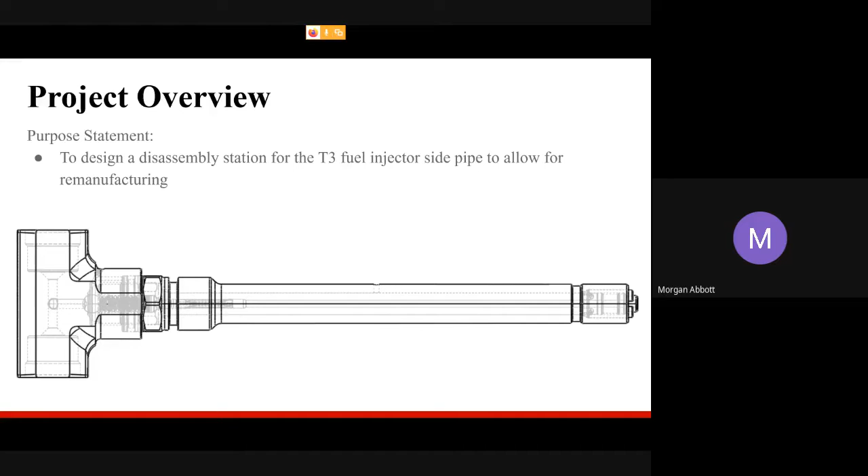Okay. The purpose statement was to design a disassembly station for the Tier 3 fuel injector side pipe to allow for remanufacturing of the assembly. Pictured is a full assembly of what we were challenged to disassemble.

The scoping statement objective was to design a disassembly station for the General Electric Tier 3 side pipes while maintaining Bosch safety standards. They gave us a budget of $20,000, and from the side pipe assembly, we had to recover the outer sleeve, the high pressure shaft, the T-piece, and the left-hand nut.

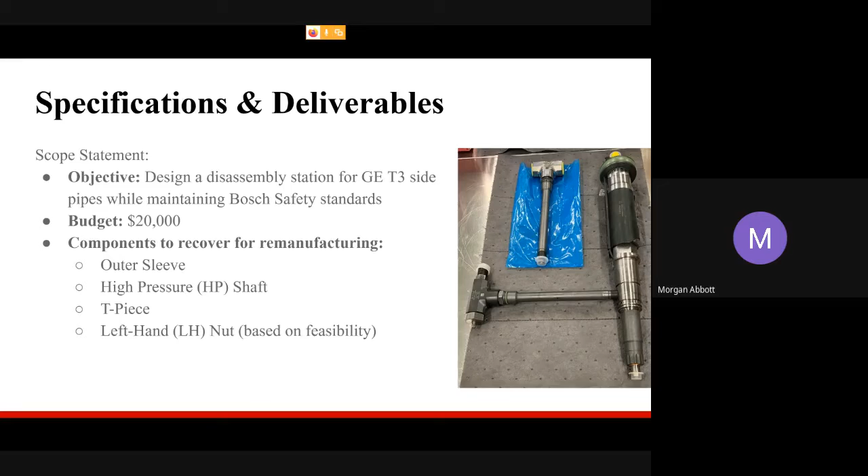The design must be capable of removing the left-hand nut, assist in the O-ring removal, pull apart the outer sleeve from the T-piece, unthread the T-piece and high pressure shaft from one another, and be able to disassemble the side pipe at any state of partial disassembly and continue in the process.

Below is a disassembled picture of the side pipe assembly, along with the parts that we needed to keep. Also shown are scrap pieces, which include the ball and spring and O-rings.

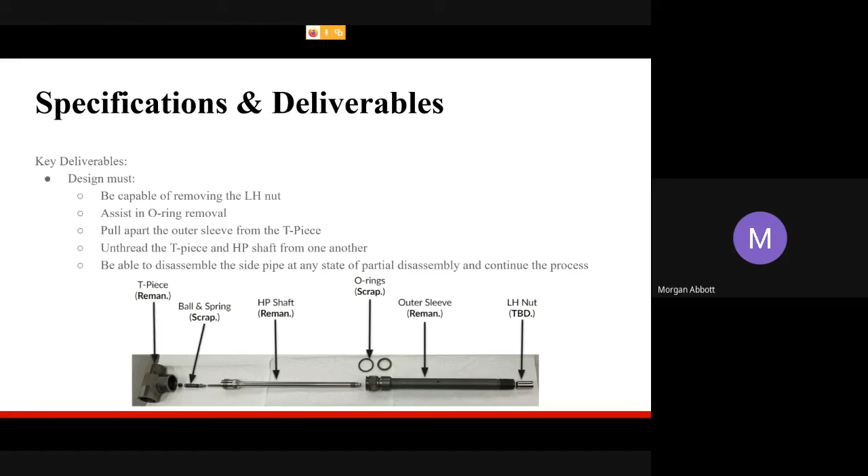For the selected concept for removing the left-hand nut, we decided to use an impact driver. The requirements for this impact driver are that it needs to supply a 90 Newton meter torque. It cannot apply an excessive torque on the user and can only rotate in one direction.

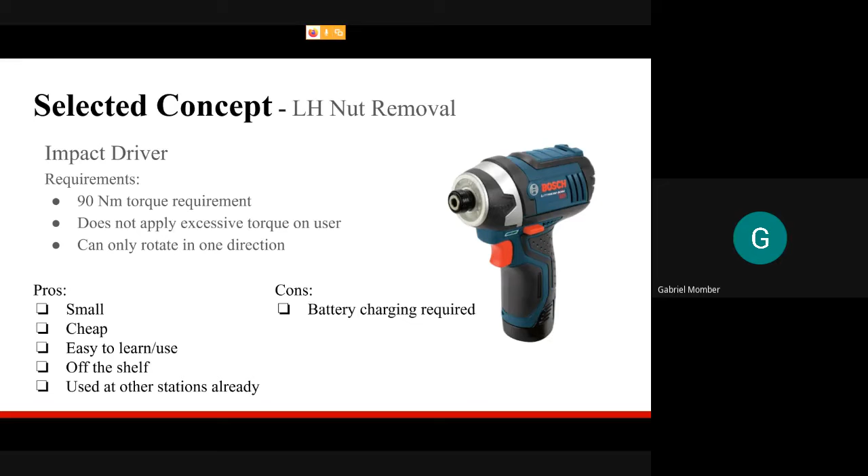The negative of this is that battery charging is required. However, the positive is that it's small, it's cheap, it's easy to learn and use, it's easy to get off the shelf, and it's used at many stations already.

In order to remove the O-rings, we decided to go with a V-shaped tool in order to push down on the outer sleeve and push that O-ring up, making space for the cutting tool to cut through that O-ring and remove it. The downside of this is that pressure is required from the operator, but the positive is that you can use it for both O-rings, and there's an ergonomic advantage for the operator.

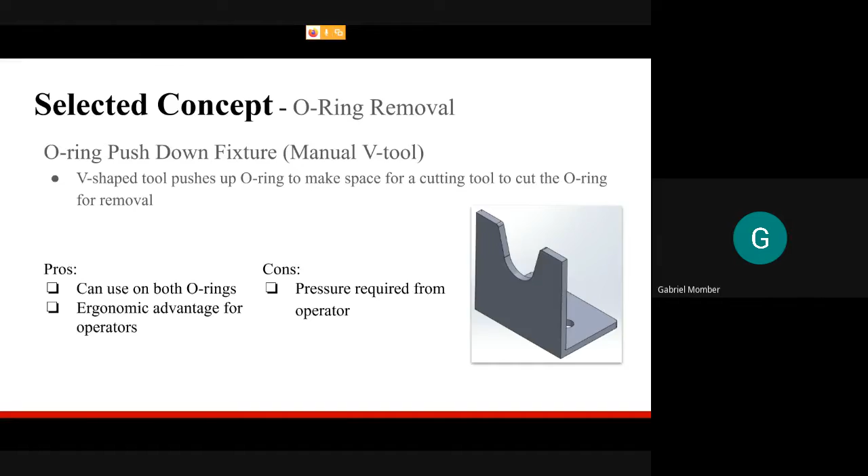In order to remove the outer sleeve, we decided to go with a U-tool with a pneumatic cylinder. We would need to supply an estimated 180 newtons or 40 pounds of force in order to remove that O-ring press fit, and it must engage with two-hand operation. The benefit of this is that it's cheap, it's clean, and it's easy to get off the shelf. However, it increases the space requirements as well as requires a two-hand safety feature.

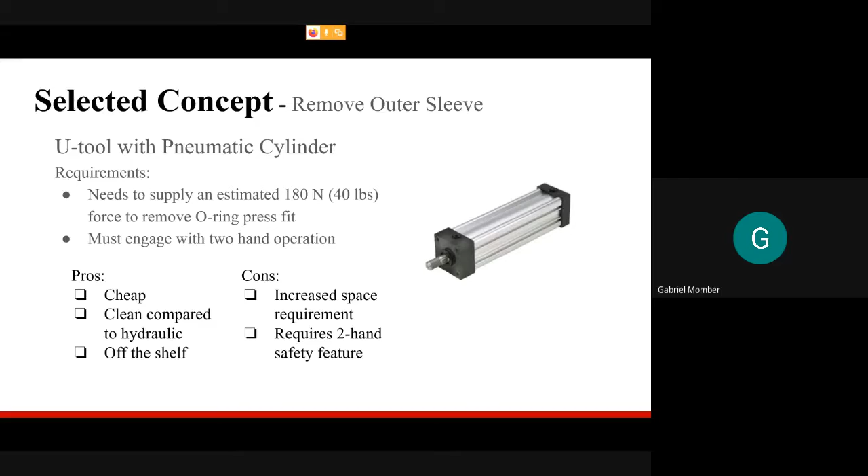In order to remove the T-piece from the inner shaft, we decided to go with an electric motor. The requirement for this is a 615 Newton meter torque. It needs to be ergonomic and it must be robust. The downside of this is that it increases the cost and requires two-hand safety. However, it is powerful, repeatable, easy on the operator, quiet, and easy to power.

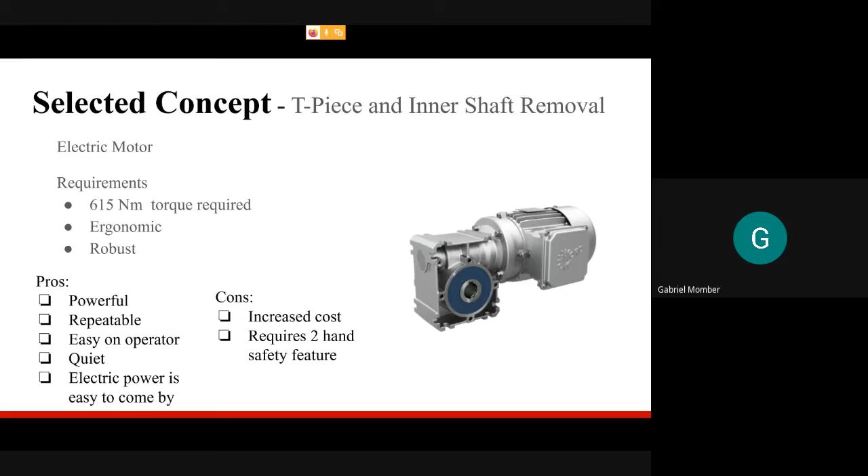The advantages of this are that it simplifies the operator's actions, it minimizes the force required from the operator, and it reduces the overall cost.

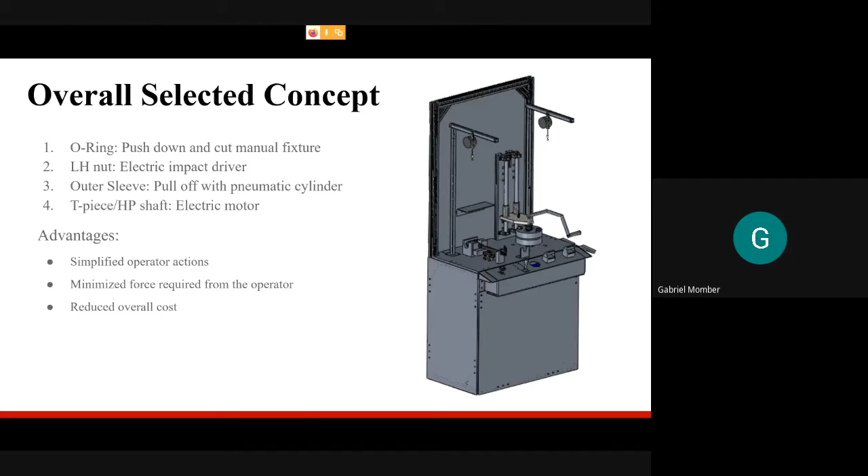Looking at our overall design, a space usage diagram was created to give an idea of what space we will actually be using. As seen in the figure on the left, our station will be about 1,220 millimeters wide by about 647 deep, with an overall height of 1,270 millimeters. Each process of the disassembly is shown, so each station.

In the green, we have the first station, which is about 375 millimeters wide. Then we have the V tool to remove the O-rings, which is about 150 millimeters wide. And the orange box shows the high pressure shaft removal station, which is 375 millimeters wide as well.

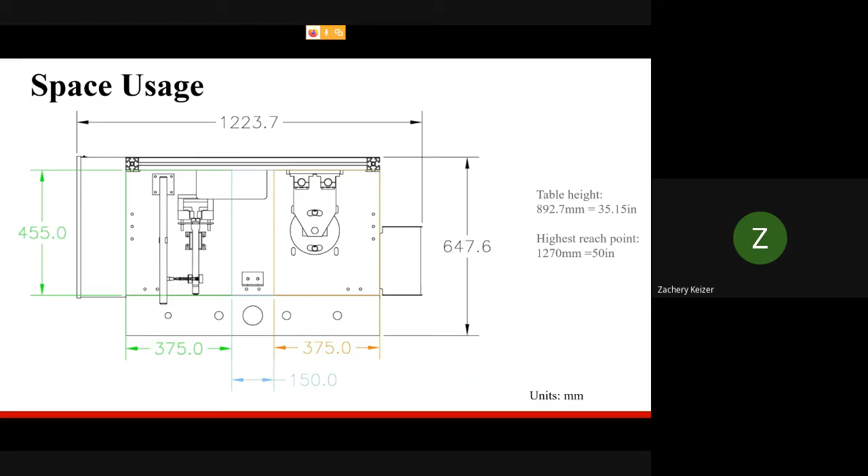With little testing, we were able to create what we believe would be a timing diagram for the whole process of disassembly of the Tier 3 side pipe. The figure on the bottom shows our estimated time for a new user and how quickly they would be able to do it. Adding all this up, we have a time of about 3 minutes and 25 seconds to fully disassemble a Tier 3 side pipe assembly for a new operator of the station.

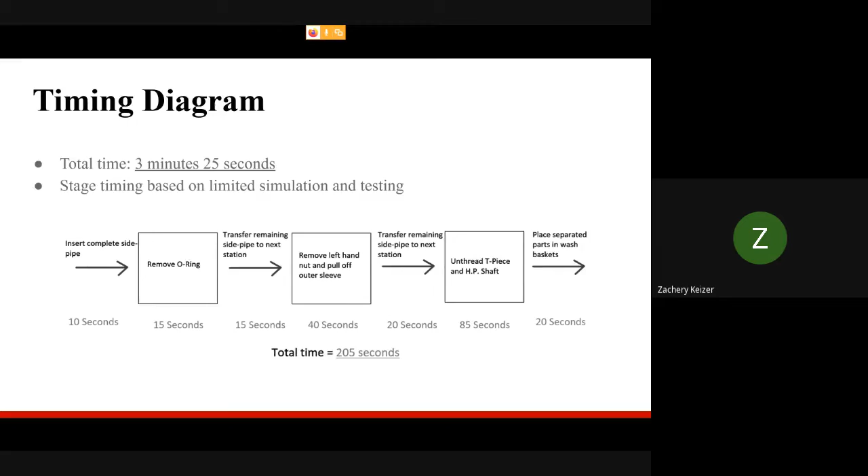As previously talked about, going a little more in depth on our process chosen to remove the O-ring, we created a 7-gauge hot rolled steel V-shaped tool, as we call it. This is nice because it allows for the removal of both O-rings, even though they are different diameters. Pushing down into this allows for cutting of both O-rings.

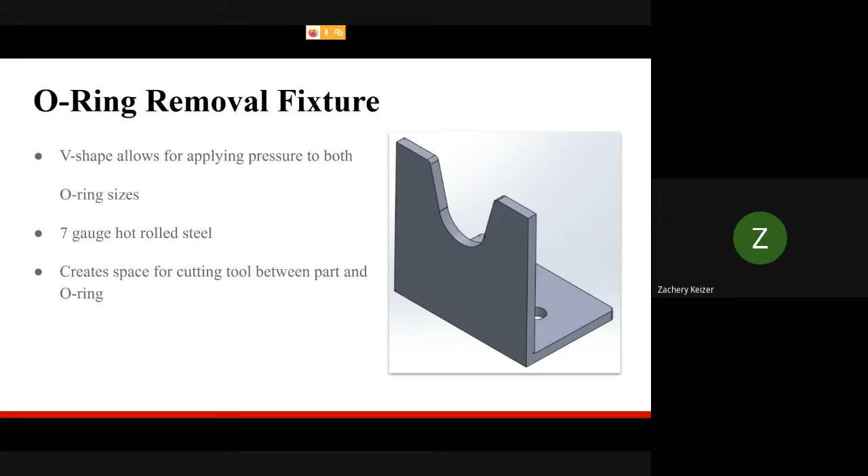Moving on to our outer sleeve removal station, we are using a pneumatic cylinder as well as 2-hand touch controls to remove the outer sleeve from the T-piece. This is done after the impact wrench is used to remove the left-handed nut. All this is held down with a spring-loaded pin to keep it from moving while the operator is doing so.

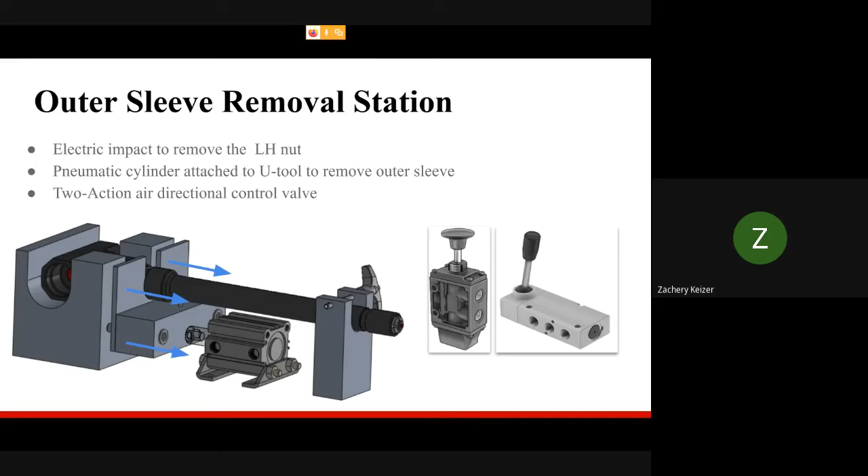Our third and final station is the T-piece and high pressure shaft separation station. As seen in the figure, we have created a wrench that will provide the necessary torque; we needed at least 615 newton meters. We will be applying 678 newton meters of torque. We will be doing this with the use of a Nord gear motor and a Leeson 2-horsepower motor. These will both be controlled electronically with Banner 2-hand touch controls system with a safety relay, which is shown in the lower left-hand corner.

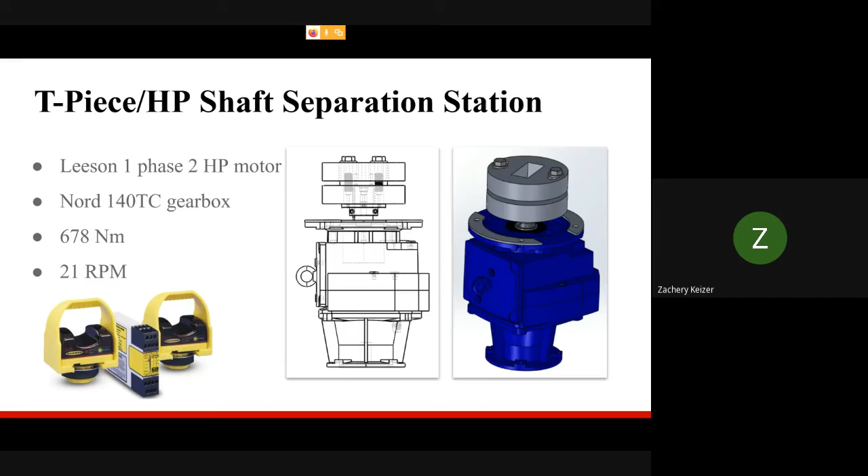The second half of that is requiring hanging on to the high pressure shaft so it does not rotate as the T-piece is twisted off. And so we came up with a linear slide and hex socket assembly, as you can see here. This allows the hex socket to move up and down and to slip over the high pressure shaft when it is placed in the vertical position.

But when locked into place or put in its lower position, it will properly secure the part so that it will not rotate, twist, or deform during the removal process. And the linear slide makes it easier for the operator to move this piece up and down without putting additional strain or additional harm to their back while using this piece of equipment.

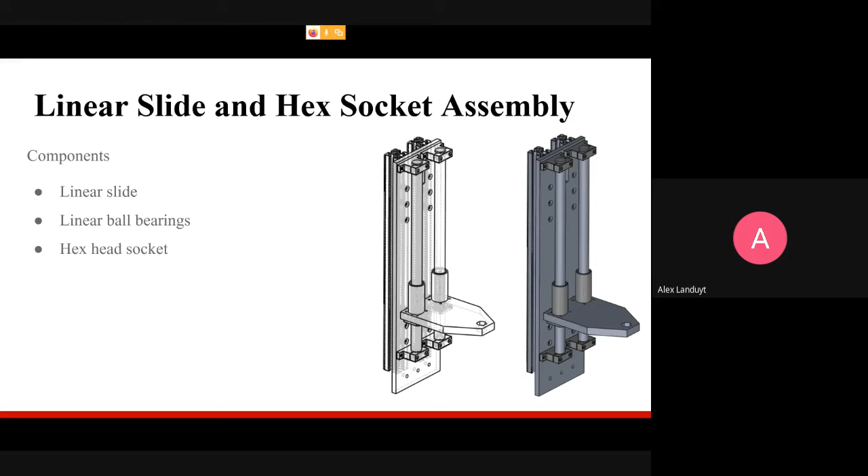We also implemented, like what Zach had mentioned, a 2-hand safety system, and this will run on 24 volt DC. This allows the system to be completely safe and remove the operator from the potential of being shocked by 110 volts if something was to go terribly wrong.

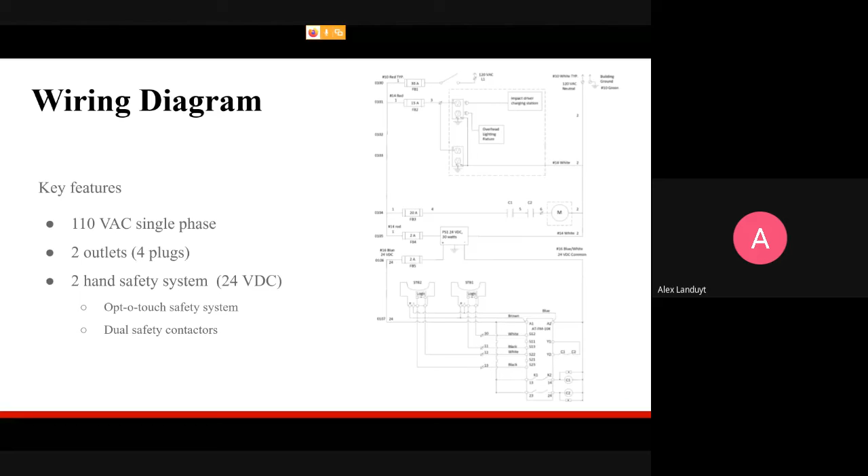And the wiring diagram on the right has all of our major components listed, as you can see there. We also have our gauge of our wire listed and any fuses that would be required, giving a complete picture to any type of electrical questions that may need to be answered down the road.

All of those electrical components come back to a panel. This is where everything will be fused together or mounted so that there's no access to the operator. And as you can see on the right side, this is laid out with all of them in order, and this would be the way you'd actually see the panel. And on the left, there's a bill of materials listing what each one of those are, along with part numbers and a description. This makes it easy for anyone to take a look at the panel and understand what is going to be doing what and how to fix it if something goes wrong as well.

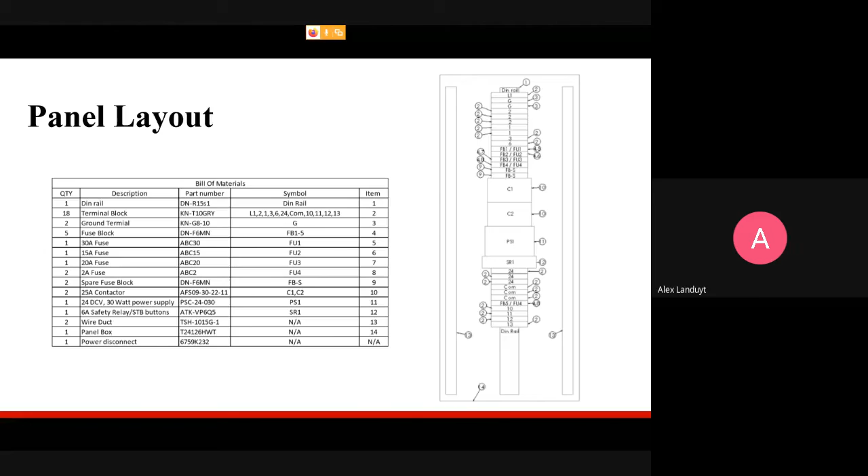In order to complete two-hand safety for our pneumatic system, we needed to come up with a diagram here as well to make sure that is run correctly. This is going back to our outer sleeve and T-piece removal. So in order to move that cylinder that will pull those two apart, we need to have a two-hand safety. So this is laid out here, obviously using pneumatics, which makes it easy and safe for the operator, as well as this drawing gives us an opportunity to make sure everything is in working order, and if something was to go wrong, parts can easily be replaced down the road.

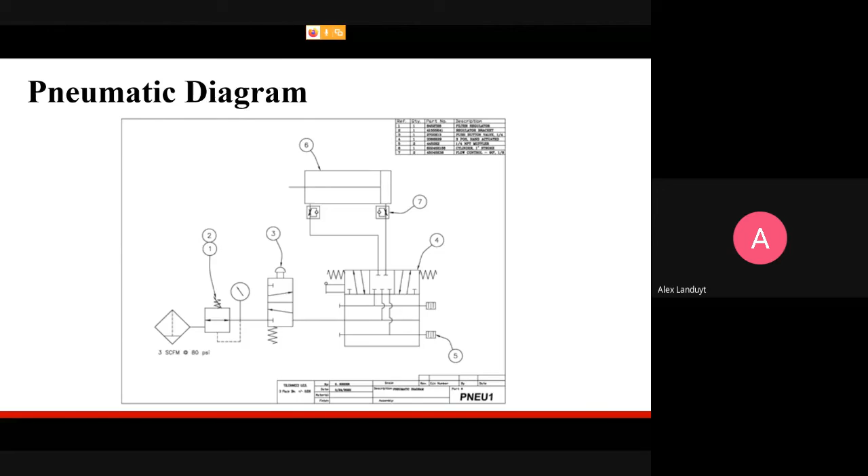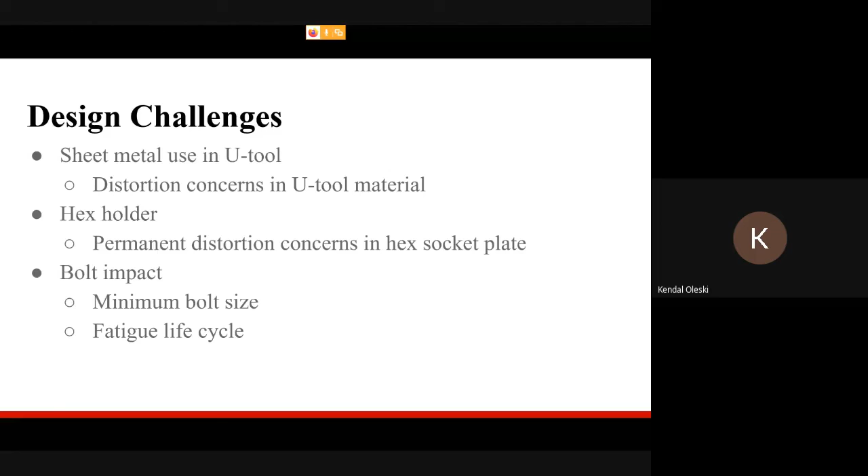This project had a number of design challenges associated with it. The tool used in removing the outer sleeve was made of 4mm sheet metal and needed to be studied in order to ensure that the tool would not distort. The hex socket plate also needed to withstand the force needed to separate the T-piece from the high-pressure shaft. Both of these parts required complex FEA analysis. The bolts used in removing the T-piece also would experience an impact force. Calculations for the minimum bolt size and the fatigue life cycle were performed in order to ensure that the design was adequate.

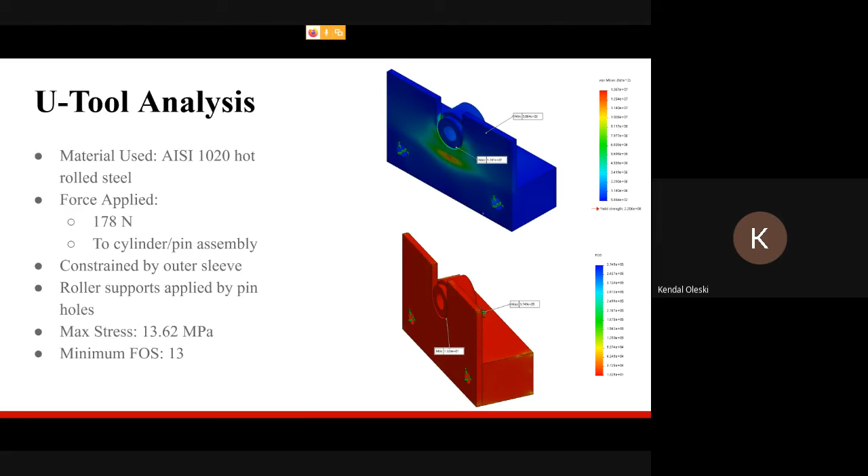Here we have the U-tool analysis. After constraining the tool to mimic the real-life force application, the maximum stress was found to be 13.62 megapascals with a factor of safety of 13. The maximum stress and minimum factor of safety were studied for the hex socket as well. A maximum stress of 6.34 megapascals was found with a minimum factor of safety of 55.

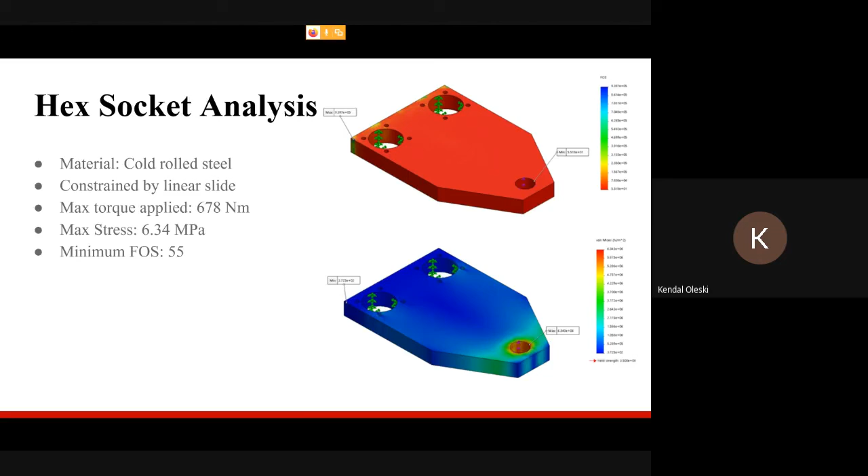Bolt impact analysis was performed using the worst-case scenario for each variable. A grade 10.9 12mm bolt was used based on the minimum bolt size calculations, and fatigue life cycle calculations determined that even with all variables assumed to be at their worst case, the bolts could be expected to last over 47,000 cycles.

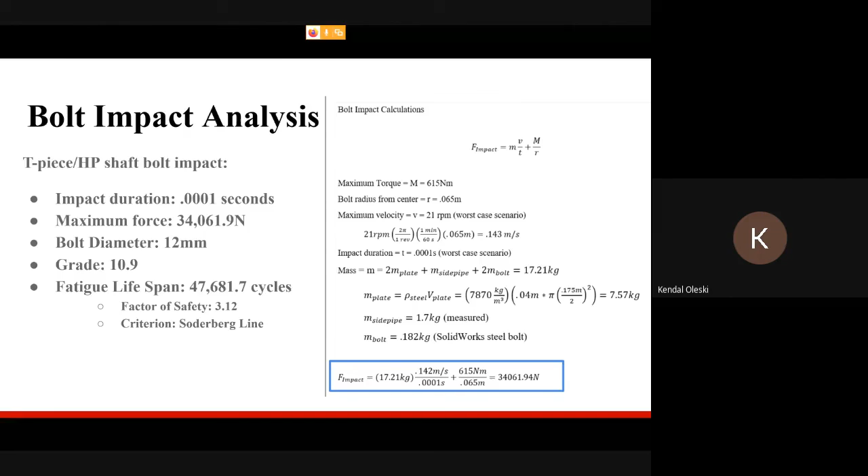After project design was completed, the specifications were met for the disassembly station, and the design was approved by Bosch for future implementation. Due to current circumstances, the originally planned build of the station could not be performed. Additional consulting was performed for further process improvement in place of performing the build.